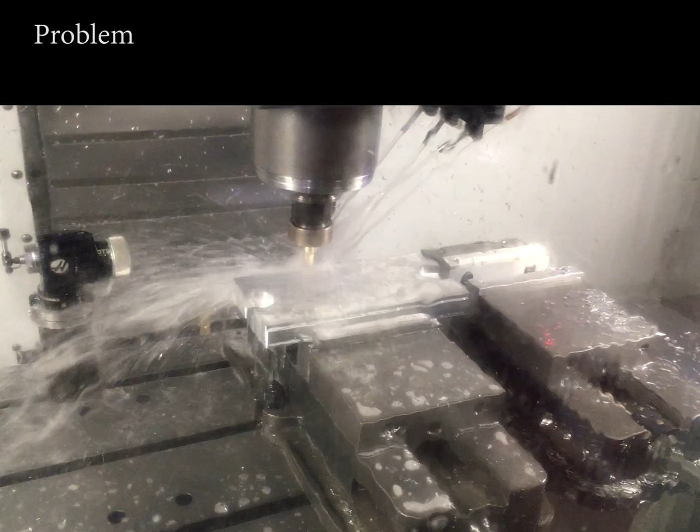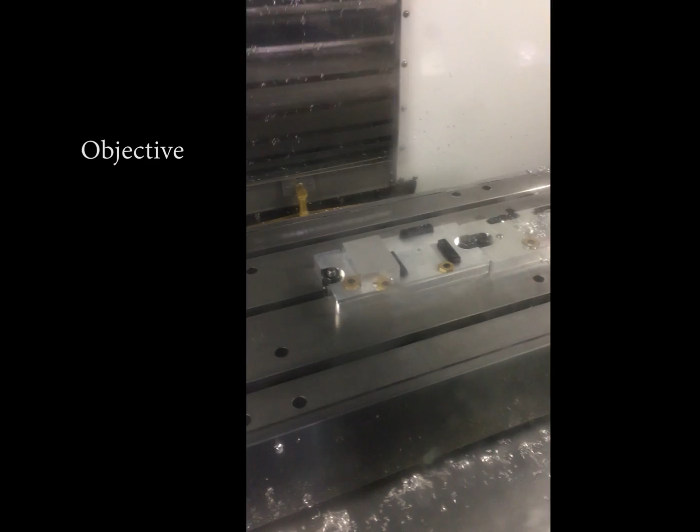We were given the dimensions of a bottle opener that was to be machined with a CNC mill. A traditional vise would be unable to hold the part for machining. Our objective as a team of 3 was to design and manufacture a CNC milling fixture to machine a 2-operation CNC mill part using Mitee-Bite fixture clamps, SolidWorks HSM Works, and the Haas VF2 CNC mill.

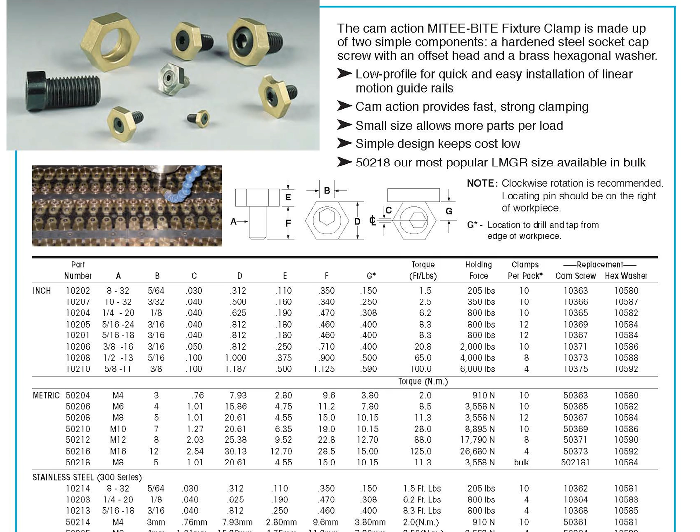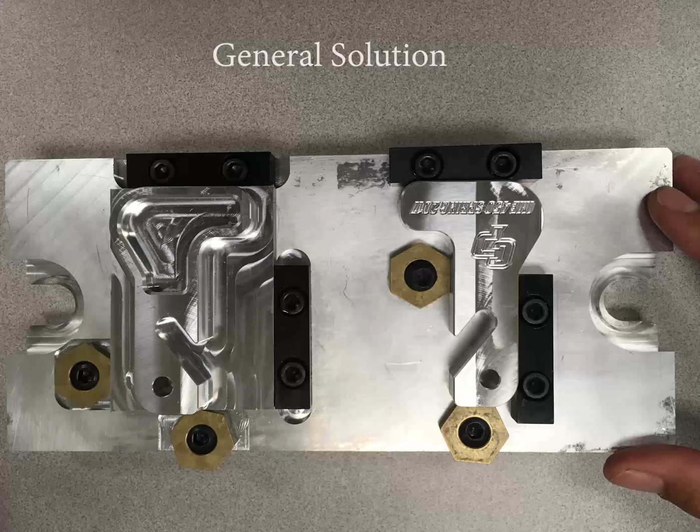In general, our solution was as follows. We took an existing part in SolidWorks, a catalog of Mitee-Bite parts, ground fixture plate, and drawing with GD&T callouts. We used all of these components to design a fixture in SolidWorks. Using HSM Works, we generated the tool paths to manufacture the fixture plate. We then assembled all locating rails and clamps. With the completed fixture, we conducted a 2-operation milling process to produce bottle openers.

Our project was subject to the following constraints. We were given a ground tooling plate, and our fixture must be able to mount in the Haas VF2 CNC mill. The fixture must be able to hold both CNC operations simultaneously, and the clamping forces must withstand the tooling forces with a safety factor of 2. Finally, we must use Mitee-Bite fixture supplies available.

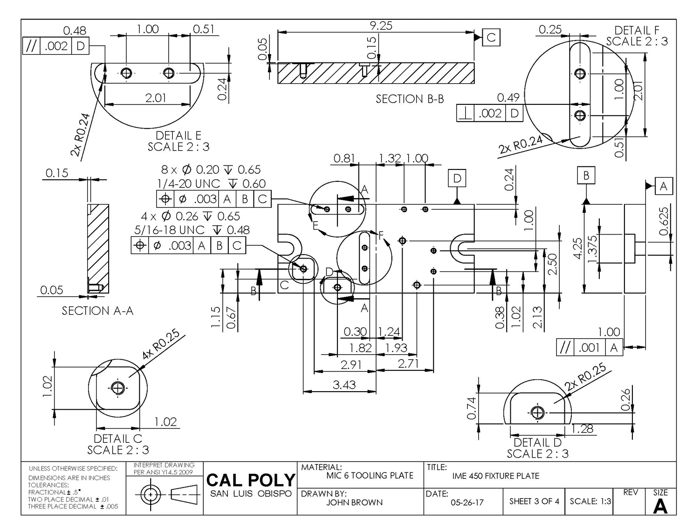We took the following steps to create our fixture. First, we looked at the part drawing with the GD&T callouts. We used this to determine what datums were most important. The first datum we used for the primary was A on the flat fixture plate. Then we put it up to datum B on a locating rail, and the same for datum C. These datums were located with Mitee-Bite rails and held in place by Mitee-Bite clamps.

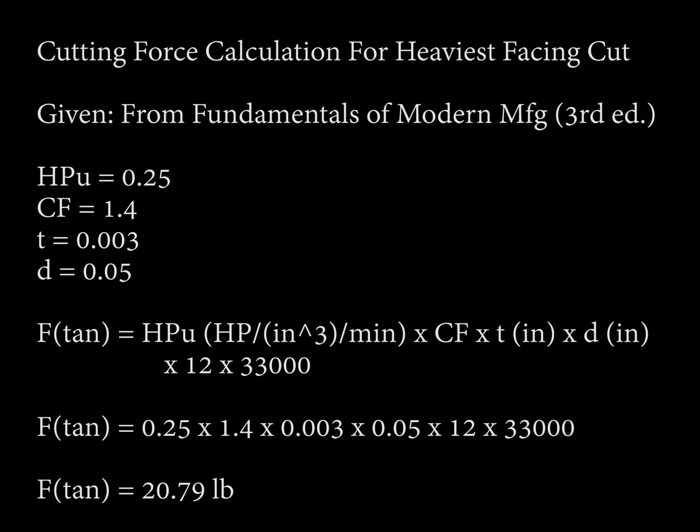We performed rudimentary cutting force calculations and found there was only 20 pounds of tangential cutting force, and that the Mitee-Bite clamps would provide adequate clamping force. Fixture geometry was modeled in SolidWorks, and the tool path and G-code were generated using HSM Works. We ran a machining simulation to determine that the fixture did not interfere with the tool path.

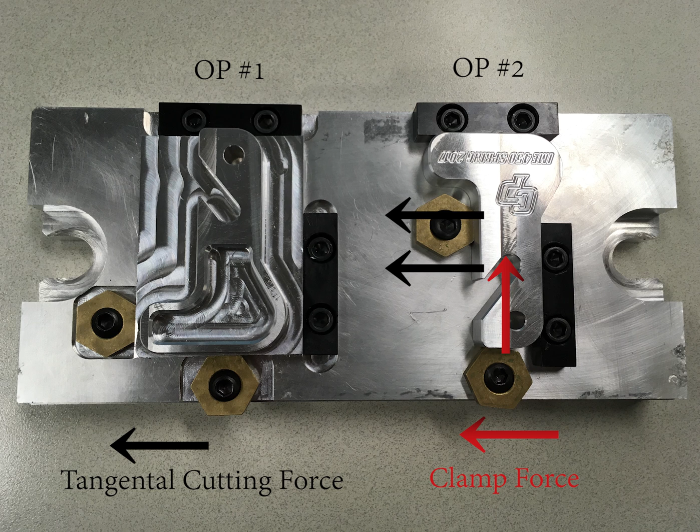This is the final design for our fixture. There's a pocket and a slot for our rails to make sure that they are not improperly located. There is a pocket and a slot for our clamps in Operation 1 as well, so that they do not interfere with the tool paths. We also cut slots for the T-bolts in order to attach to the Haas VF2.

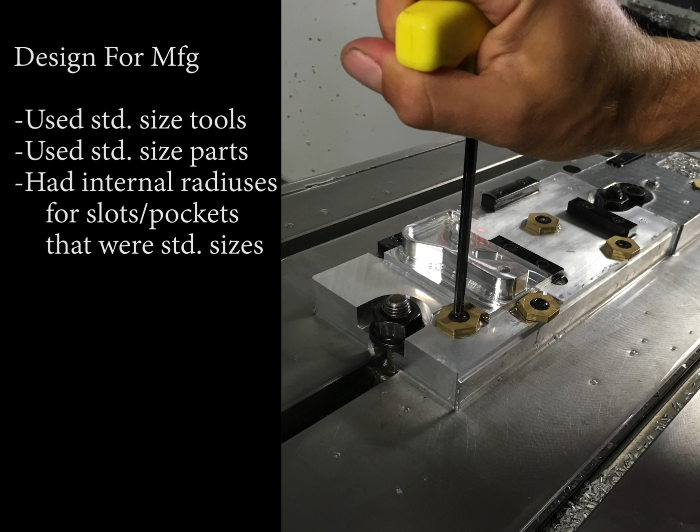The following DFM considerations were observed in our project. We used standard size cutting tools and standard size clamps and rails. Also, we used internal radiuses for all slots and pockets, so that a standard milling procedure could be used to machine these features. This fixture was designed using single-minute exchange of die principles.

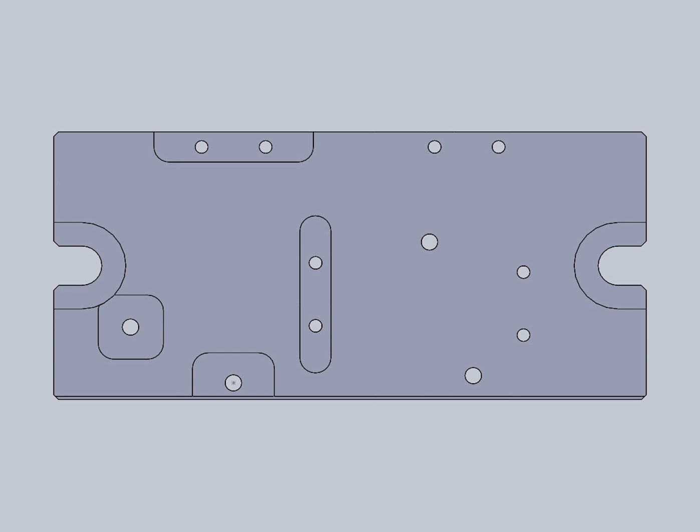The fixture was machined using a single operation on the Haas VF2. It was clamped with a soft jaw vise and probed such that the working coordinate system would be in the middle top plane of the part. We then assembled the fixture, and this was bolted to the VF2 and aligned using the milled indicating band. 2 working coordinate systems for Ops 1 and 2 respectively were found by probing the fixture rails.

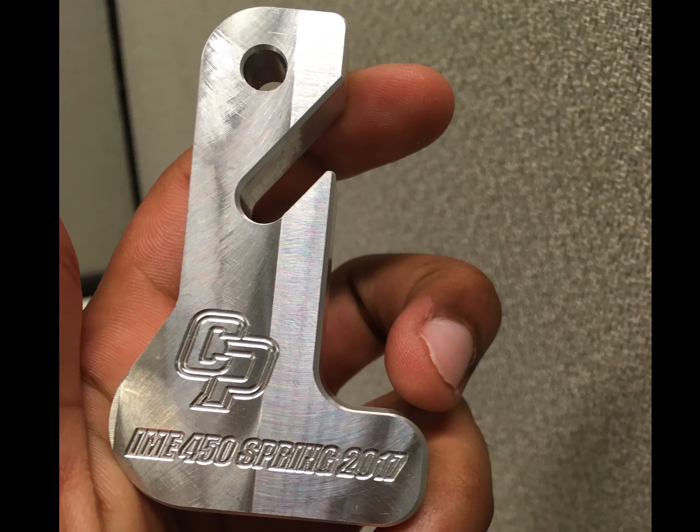6 parts were produced using this fixture. Operation 1 had a load time of 15 seconds, well under the constraint of 1 minute. It had a run time of 8 minutes.

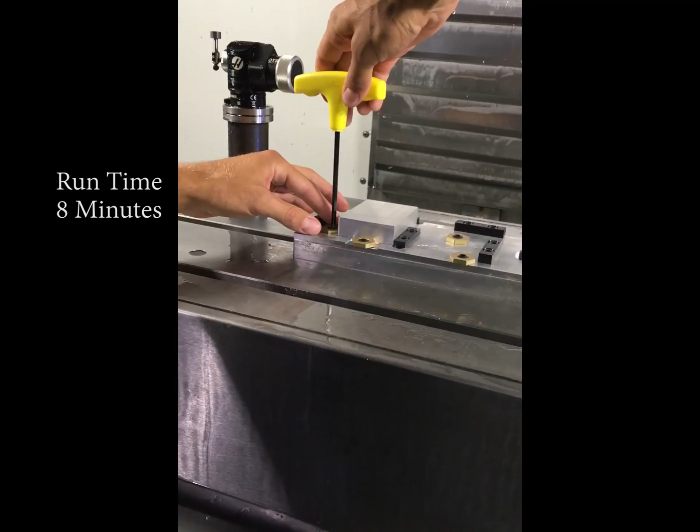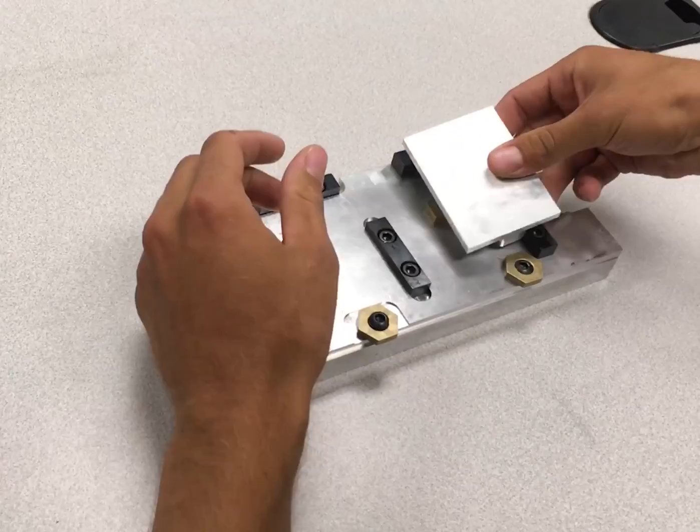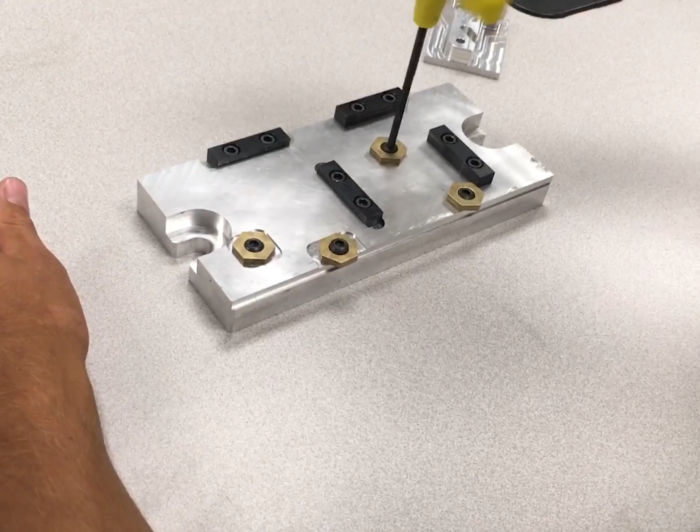So one major design flaw was that when you're moving the part from Op 1 to Op 2, the second Mitee-Bite clamp is covered up. As well, due to the part variation or maybe the manufacturing variation of this hole, it didn't actually fit smoothly in the fixture. So the way we fixed this is by just removing this clamp. And it turned out that the cutting forces were small enough that it wasn't actually necessary.

Operation 2 had a load time of 28 seconds, also under the 1 minute constraint, and had a run time of 3.5 minutes.

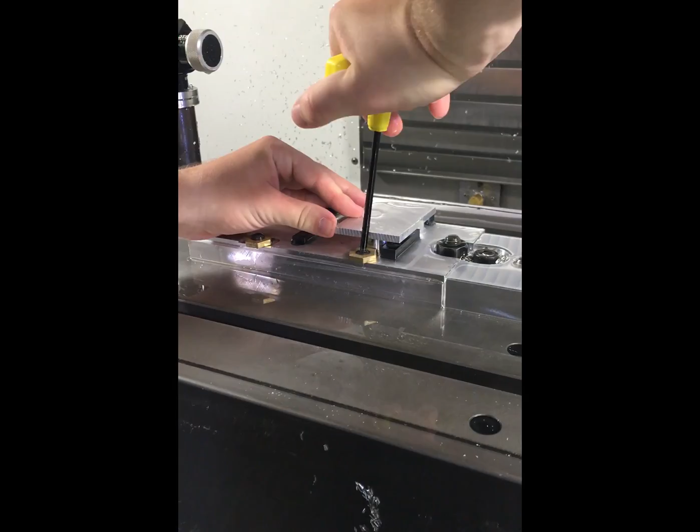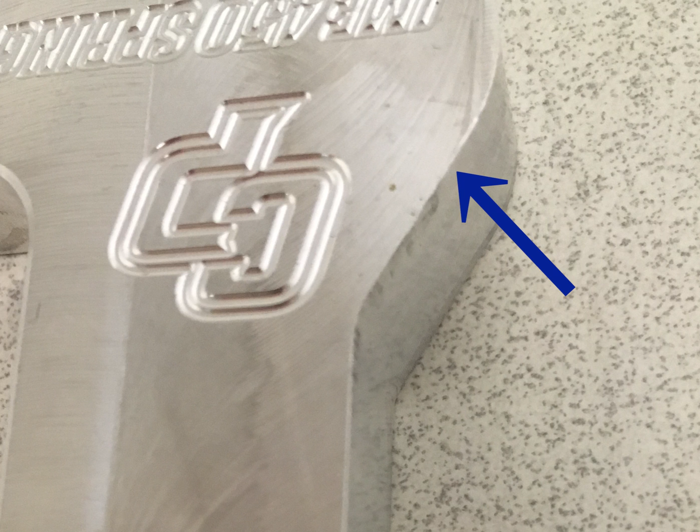Our parts suffered from one major defect. Parts shifted slightly in the x-axis in Operation 2, causing the chamfer to be too heavy on one side and non-existent on the other side. We believe that the chamfer defect is due to the removal of the second Mitee-Bite clamp, which allowed the part to shift slightly in the x-axis.

In conclusion, we were given a bottle cap with GD&T drawings, and we used this to make a fixture utilizing SolidWorks, HSM Works, a Haas VF2 mill, and Mitee-Bite clamps and locating rails. In general, we had good quality parts and no catastrophic failure of the fixture. However, we noticed some degrading of the quality over time, as we mentioned with the chamfer issue, due potentially to having to remove the Mitee-Bite clamp from the X direction.

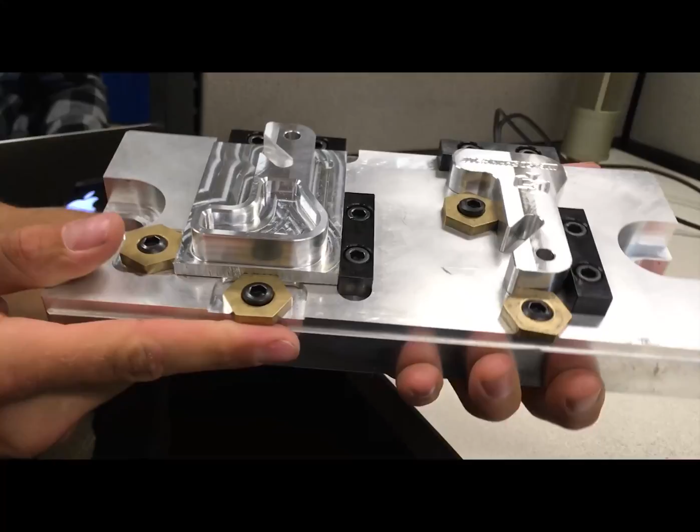If we were to redesign this fixture, the first thing we would do is add slots and pockets to the Operation 2 rails in order to locate them properly. Second, we would drill a hole above the X-axis clamp on the Operation 1 workpiece so we can reach it for Operation 2.